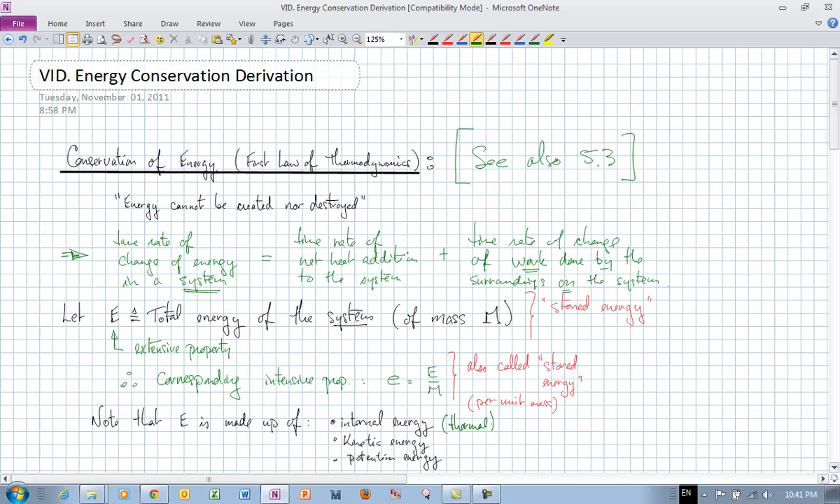Okay, so what makes up this stored energy? What are all the components of it? Well, we've all seen this before. The main components of stored energy are the internal energy, also called the thermal energy of the system. This is why a cup of water at room temperature has less stored energy than a cup of water that you put in the microwave for a minute. That's because the component of stored energy made up of internal energy is higher in the hot water than the cold one.

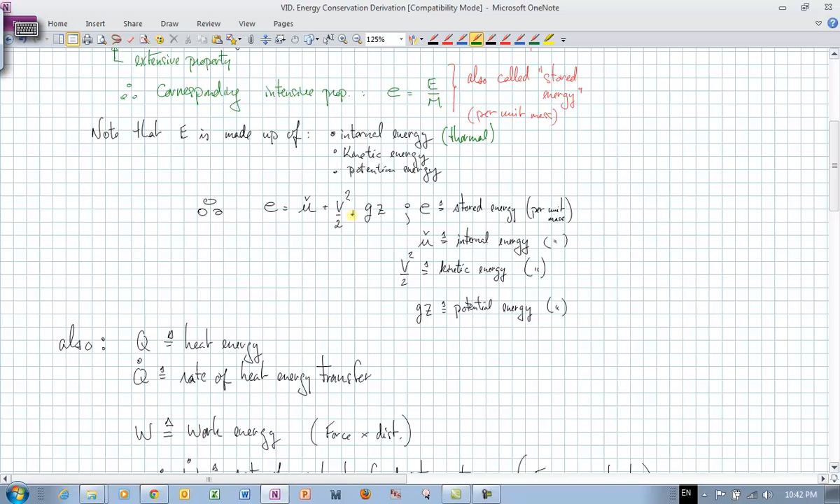Kinetic energy, that's the energy due to the movement of the particles. Half mv squared is what we're used to thinking, so therefore the kinetic energy per unit mass is simply v squared over 2. And the potential energy, the energy due to the position of the particles above a datum, mgh is what we're used to seeing. So per unit mass is going to be mgh divided by m, or gh, or according to a datum that goes with z, g times z. So therefore the total stored energy is going to be the sum of these three different forms of energy: internal energy per unit mass, kinetic energy per unit mass, and potential energy per unit mass. So that's it for the stored energy of the system.

Now we talked about heat, so let's go over that a little bit more. That's one of the things that can change the total stored energy of the system. So we're going to use the letter Q to denote the heat energy added to the system, or the rate at which that heat energy is added. We're going to call it Q dot.

Similarly, the total work energy that is being added to the system, we're going to denote that with the letter W, or the rate at which work is being transferred into the system is W dot, and of course the time rate of change of work is power. Remember from basic physics, work is defined as force times distance.

So the rate at which we're going to do work on a system is going to be force times distance over time, or velocity. Force times velocity. We're going to use that in a few minutes to illustrate an important point. But for the time being, let's just worry about Q dot for heat in and W dot for work.

Alright, so how do we go from this system representation to a control volume representation? Well, we're getting pretty good at that. We're using Reynolds transport theorem.

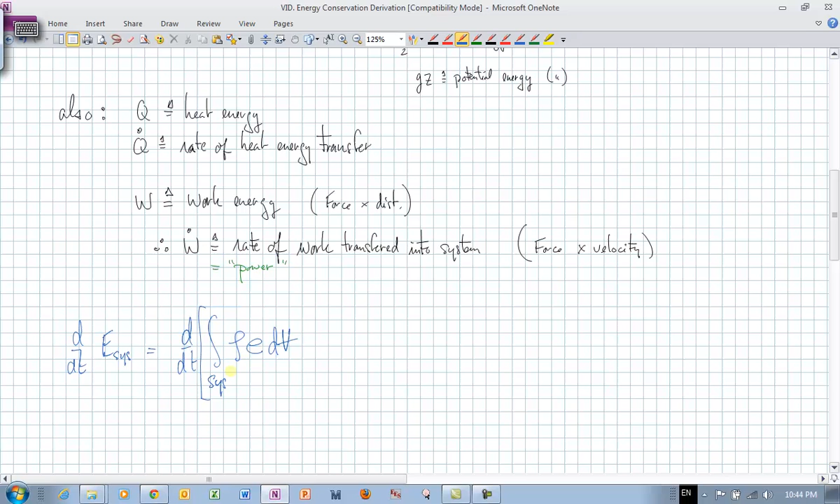So let's look at how we would use Reynolds transport theorem to do that. I've got a system with total energy big E sub sys, which I can get by integrating over the volume of the entire system, multiplying the density at any point within the system times the stored energy per unit mass times dV of that system. By this time it should be pretty clear to you why those two are the same.

So we've got that now in a nice form that we're used to using Reynolds transport theorem with, but we're not going to use it just yet. We're going to express the statement of conservation of energy on that quantity on the left here. So we're saying that's equal to the total energy being added to the system. The rate of change of the stored energy is equal to the total energy added to the system, which is made up of two parts, heat and work.

So we've got Q dot net in for the rate of heat addition, plus W dot net in for the rate of work addition onto the system. All this is system based. So that's our general statement of conservation of energy.

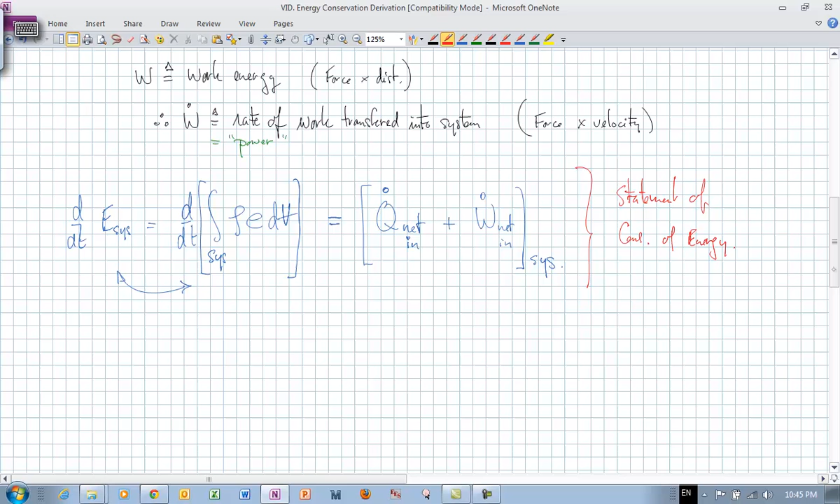Now we're in good shape to start applying Reynolds transport theorem. I'm going to use a representative control volume on which I'm going to apply Reynolds transport theorem. I'll use the RTT number 1 form, the restricted form, and simply generalize it afterwards to RTT number 2 and the general RTT form without proof. So we'll prove it for RTT number 1.

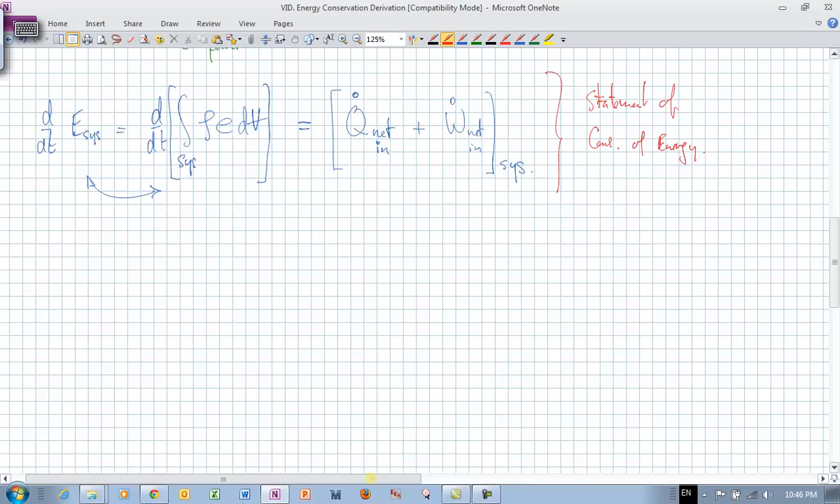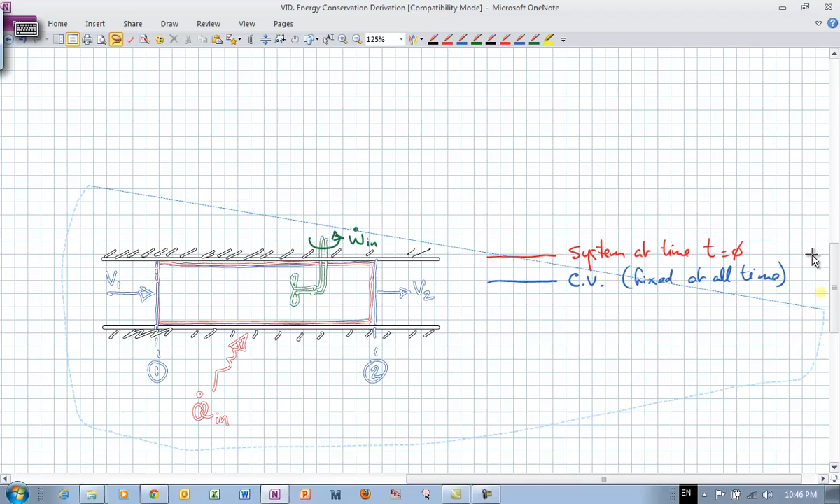Okay, so let's look at an appropriate control volume, and I'm going to use some of my witchcraft here to speed things up. So that's the system and control volume that I want to use for Reynolds transport theorem.

So we've got flow in a pipe, for example. We've got a fluid of fixed mass quantity illustrated in red, which represents our system at time t equals 0. At that time, this system matches exactly an outline in blue corresponding to our fixed control volume in the pipe setup. At face number 1 of the pipe, we have velocity coming in at speed v1. At face number 2, velocity going out at speed v2. We're adding heat to the system in this part of the pipe at a rate q dot in, and we've got a propeller shown in green that's adding work to the fluid, shaft work, at a rate w dot in shaft. I'm putting 'shaft' here to differentiate it from something else we're going to do in a few minutes.

So what do we have here? We have one inlet and one outlet, denoted by 1 and 2. We have uniform flow properties at plane 1 and plane 2, at inlet and outlet. Remember, I'm not saying the properties are uniform throughout the entire control volume, just that they're uniform along the plane through which there's mass transfer in the control volume. That's all we're saying. And third, the flow is perpendicular to the inlets and outlets. I use the plural here, but of course we only have one in and one out.

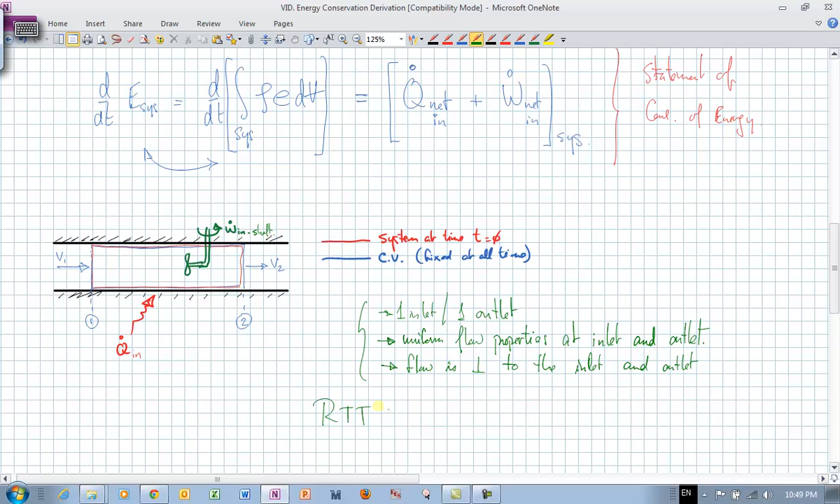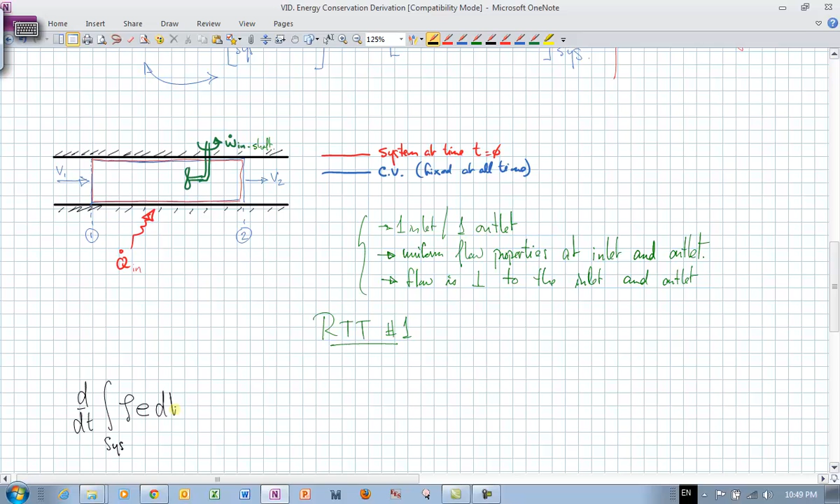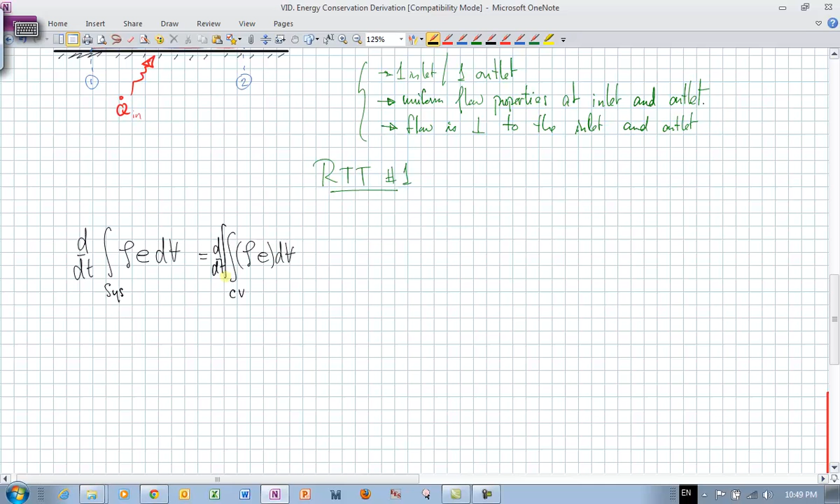So with these 3 conditions, what's the form of Reynolds transport theorem I can use? That's right, RTT number 1, the restricted form. We know how that works. Let's go with it. It's telling us that the derivative of the integral over the system of rho e dV must be equal to the derivative of the integral over the control volume of rho e dV, plus our unsteady term.

Minus rho v a times little e at the inlet, plus rho v a times little e at the outlet. That's our Reynolds transport theorem.

And of course, because of conservation of energy, as we stated before, this guy right here on the left is equal to Q dot in net plus work dot in net. I say net because there could be some work being extracted from the system and some work being added to the system. Really what I care about is the balance of those two things, the net addition of work to the system.

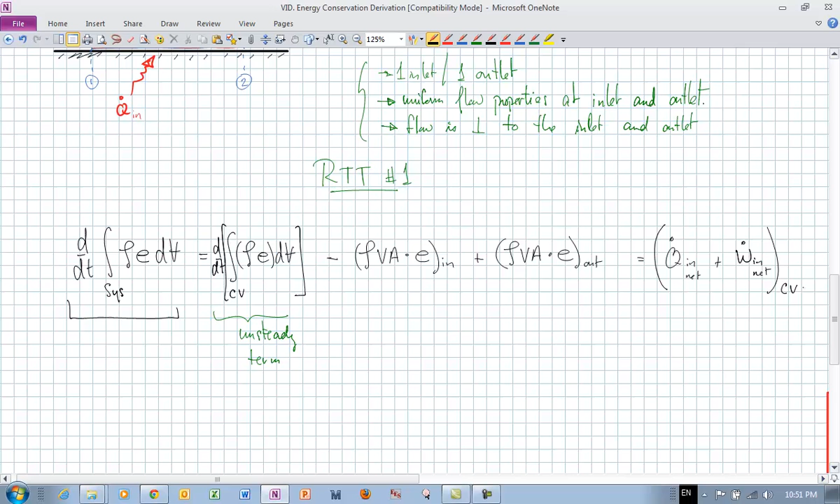At a time t equals 0, the system coincides with the control volume. So while strictly speaking, this energy addition was for the system at t equals 0, which is where I'm applying Reynolds transport theorem, this is the heat and the work done on the control volume. So our statement of conservation of energy was this, but Reynolds transport theorem allowed us to say that.

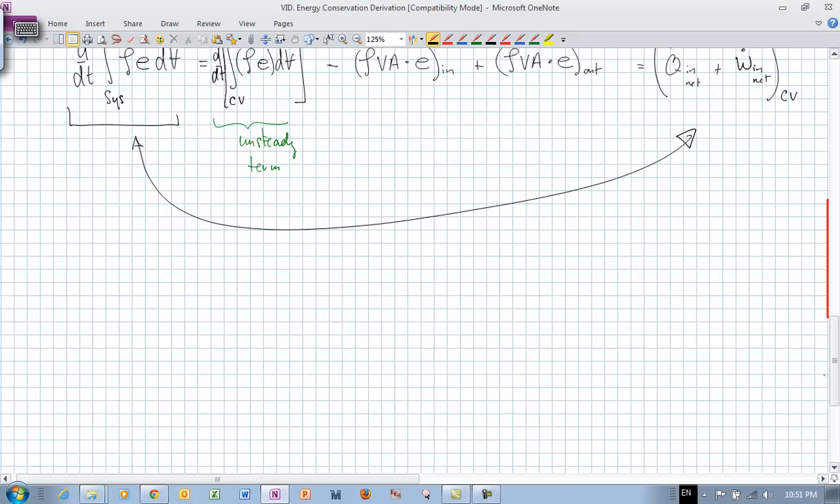So therefore, the net result for the energy equation is this guy right here, first form of the energy equation. Energy equation, first form. Et voila.

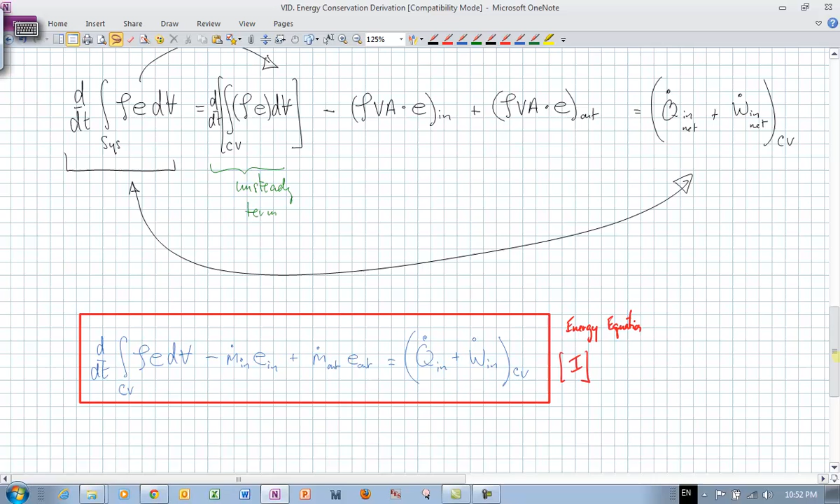Okay, but we're not quite done yet. We've got a little bit more to do. You should recognize here, there's one more thing that I skipped. This guy right there is, of course, equal to m dot in. This guy right there is m dot out. Hence, how we ended up with this form right there.

Moving on, I want to highlight a special feature of the work input to the system. The work input to the system can really be broken down into two parts. The first part is the shaft work that would correspond to the propeller in the little control volume I showed you before, plus another type of work that I'm going to call flow work. Okay, flow work. What is this flow work?

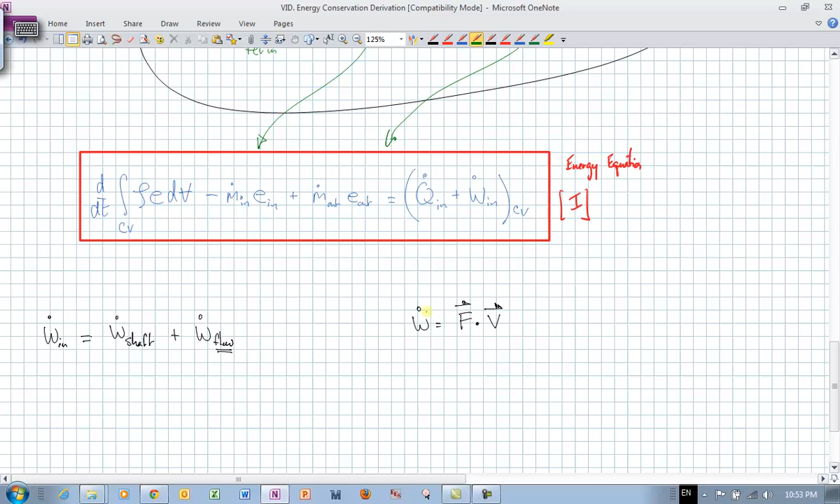Well, it comes from the fact that the rate at which we do work is equal to the force vector dotted with the velocity vector on a fluid. You notice here that the rate of doing work to the control volume is a scalar, but each of those guys on the right hand side is a vector, right? Of course, the fact that we've got a dot product in between turns this into a scalar. So what this tells us is what we're really interested in is the orientation of the force acting on the control volume and the velocity at which the fluid flows into the control volume. So that would represent a form of work, the flow work.

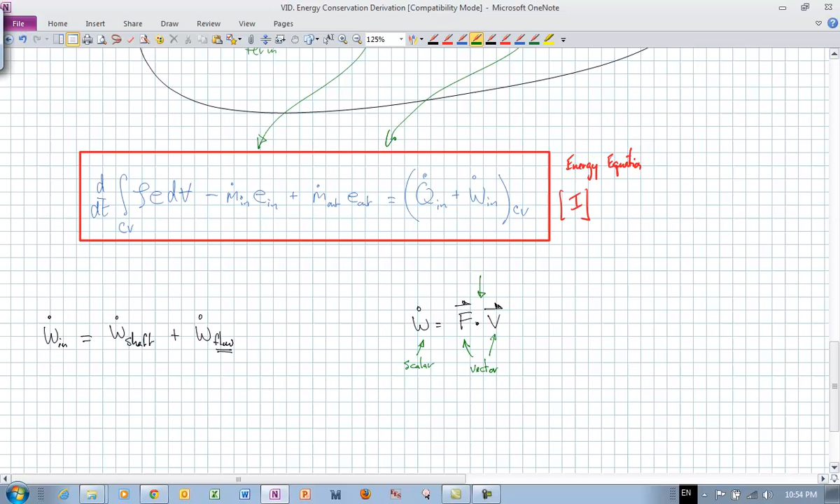Okay, so what are the forces that create this kind of flow work on our control volume? It would be the normal stress that's acting on each of the surfaces of our control volume. So let's look at what they look like. Normal stress corresponds to forces acting on the control volume surfaces.

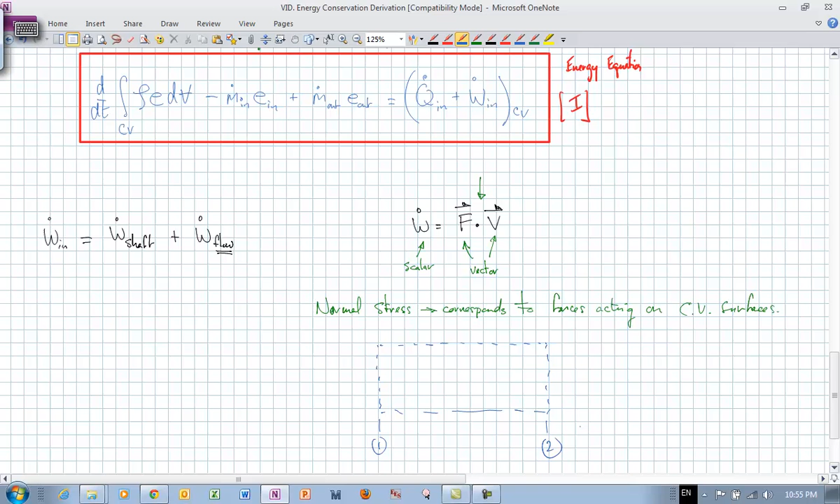So in our case, what we're looking at is our control volume. I'm not showing the wall of the pipe, I'm just showing the control volume, which has these two sections, 1 and 2, and the velocity that comes in on that side and the velocity that goes out on that side.

We still have a normal, okay, these are vectors, so we put those down. We have normal vectors at each of the surfaces, and these normal stresses acting on the surfaces are due to the pressure of the fluid. So we've got a pressure force. Remember, pressure is a scalar, but the pressure is acting inwards on all of the surfaces. So I'm going to have a pressure force on each one of these surfaces. And since it's a scalar, I have to multiply it by the normal to get the vector force that acts in that direction.

So in this case, I'm going to have the pressure times the area, a scalar, times minus the normal vector in order to get the vector pointing in the right direction over here. Similarly, on that side, I'm going to have the pressure times the area times minus the normal vector to that area to get the proper direction. At the top and bottom, what we've got is the same thing. I've got PA times minus N, PA times minus N.

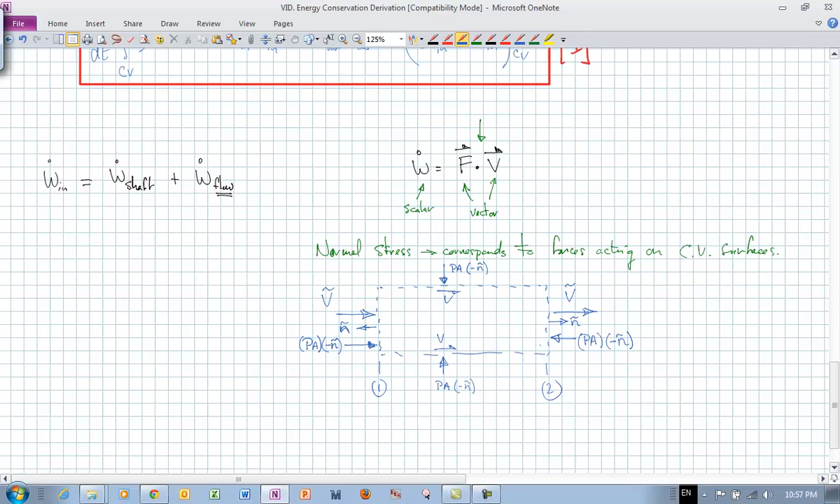Okay, so let's break this down into the two surfaces, the inlet surface at 1 and the outlet surface at 2. I'm going to use a subscript 1 for in and 2 for out. So at 1...

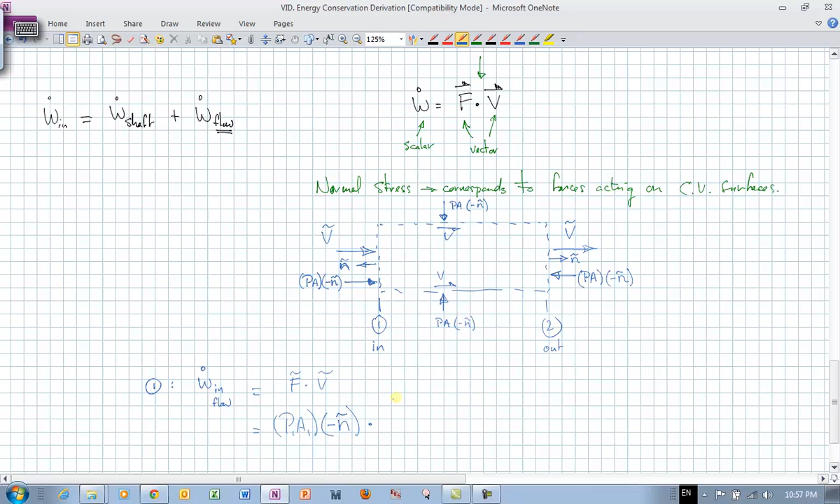My work in due to flow work is going to be equal to the force times the velocity at 1, which is equal to P1 times A1 times N, times minus N, dotted with V at 1. So this is equal to minus P1A1, just a scalar, times N dotted with V at 1.

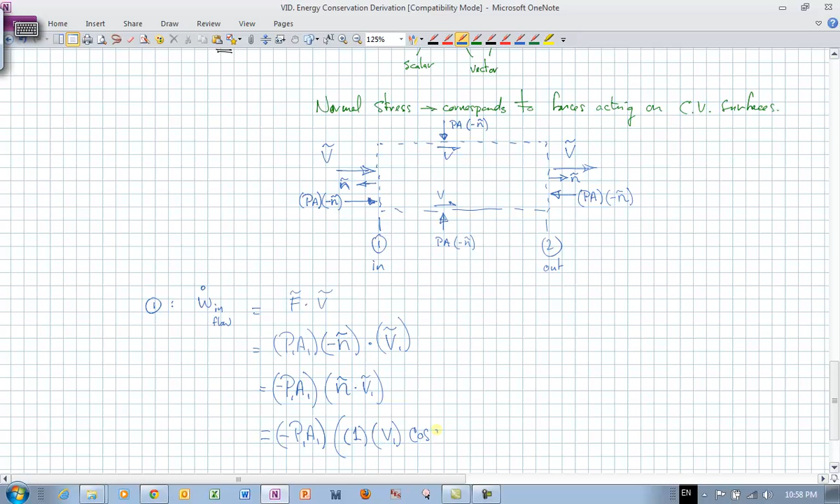Well, N dotted with V at 1 is equal to the magnitude of V, the speed, times the magnitude of N, 1, and the cosine of the angle between them, which is 180. So I'm going to go through this in every detail here so there is no confusion. So I've got P1A1 times the magnitude of N, which is 1, the magnitude of V1, which is V1, not a vector anymore, just a scalar, times cosine of the angle between them, which is 180. And of course the cosine of 180 is minus 1, so you see where this is going. So I've got minus P1A1 times V1 times minus 1, which is equal to plus P1A1 V1.

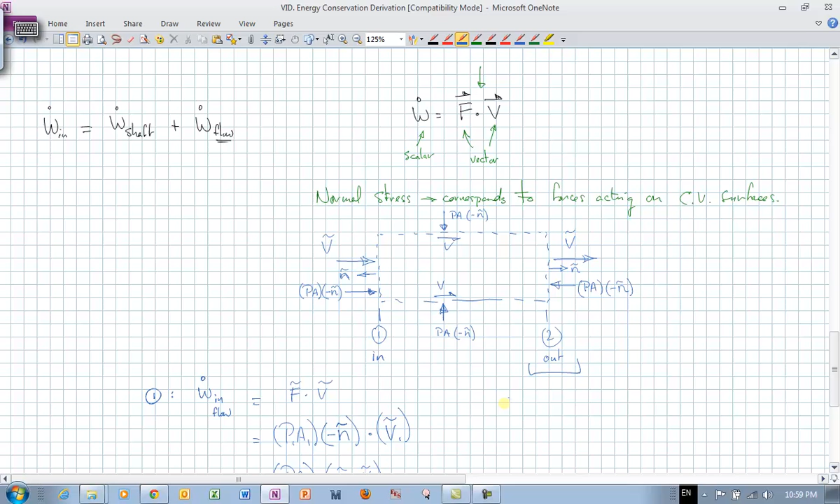Okay, so this is the flow work going in to the control volume at surface 1. Okay, at surface 2 now, so 2 is my outlet. Okay, I'm going to do this over here, maybe at 2.

What do I have? I've got the work that is now out due to flow, right? Because flow is coming out of my control volume. It's pushing on the fluid that's outside the control volume. So I'm extracting work energy out of the control volume. It requires energy from the control volume to perform this work.

So it's flow work out. That flow work out is equal to the force exerted by the control volume on its surrounding times the velocity at which it's going, which itself is equal to P2A2 times minus the normal vector at 2. That's the force exerted by the control volume on the surrounding fluid, dotted with the velocity at 2.

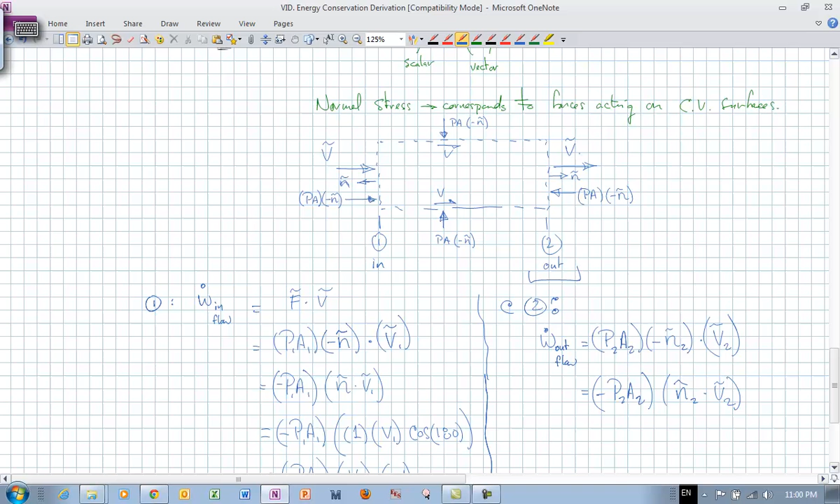Okay. Well, in a similar manner to what we did before, that's equal to minus P2A2 times N2 dot V2. Well, in this case, though, V and N are oriented together because they're both pointing outside, so the cosine of the angle between them is going to be plus 1. So this whole thing here is going to be equal to minus P2A2V2. V2 is the speed at 2.

Alright, so I've got an expression now for the flow work out, at surface 2, and the flow work in, which is at surface 1. So therefore, the flow net in is going to be equal to work in flow minus work out flow, which is going to be equal to P1A1V1 minus...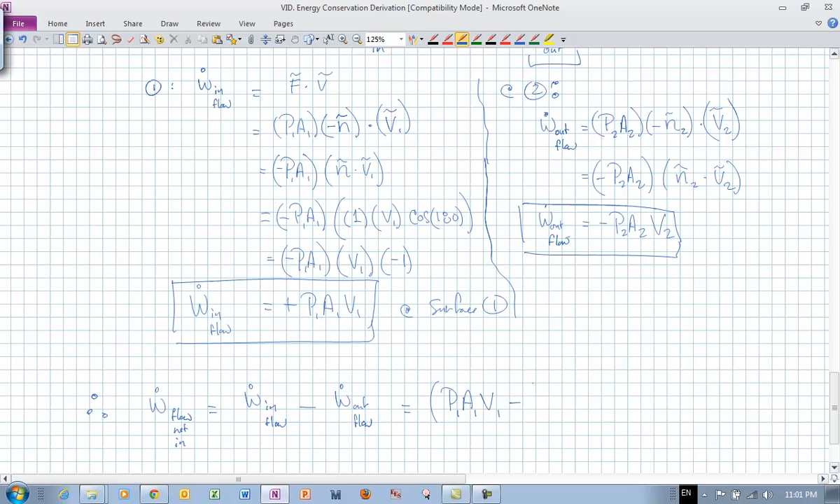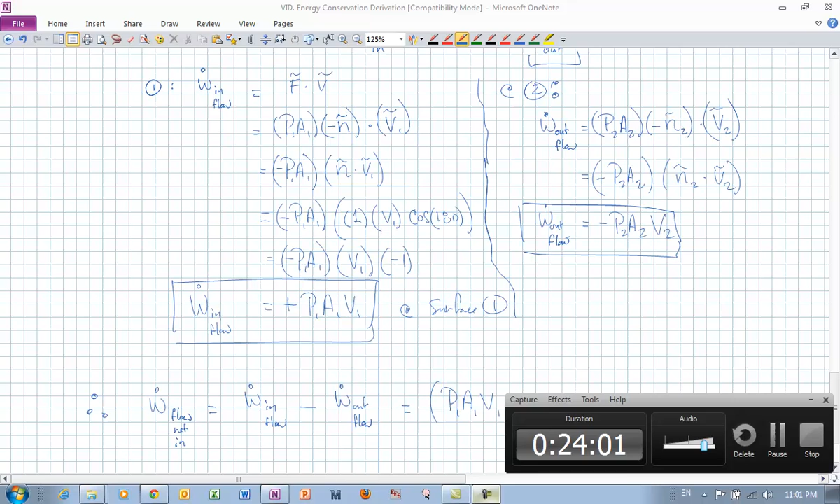Okay, little error here. I'm going to have to correct that. Sorry about that. So the force, the work is the force times the velocity, but they both have to be aligned. It's the force times the velocity in the same direction. So my vector right here is not pointing in the correct direction. That's the force exerted by the surrounding onto the control volume. But what I'm interested in here is the force exerted by the control volume on the surrounding, because that's the work that I'm extracting from the control volume.

So really what I've got is a vector pointing in this direction that represents the force at 2, the force that the control volume is exerting on its surrounding. The magnitude of that force is PA, a scalar, times N, a vector that points in the other direction. So let's correct what we've got over here.

So that means I've got F2 dot V2, so F2 is P2A2 times N2 dotted with V2, which is equal to P2A2 N2 dot V2. N2 and V2 are aligned together, so that gives me the net flow work out of the control volume, or the flow work due to the control volume exerting a force on the surrounding, equal to P2A2V2. Okay, alright.

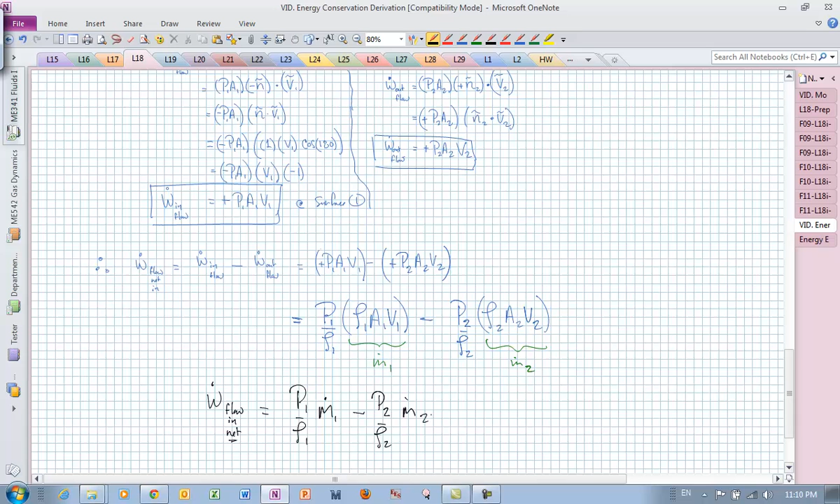Okay, and that gives me my final result, what I was really after, which is the net flow work in, which is equal to P1 over rho1 times m dot 1 minus P2 over rho2 times m dot 2. And what I'm going to do with that is I'm going to

substitute that back in that equation that I had for one before. So substitute in energy equation 1. And get... one moment.

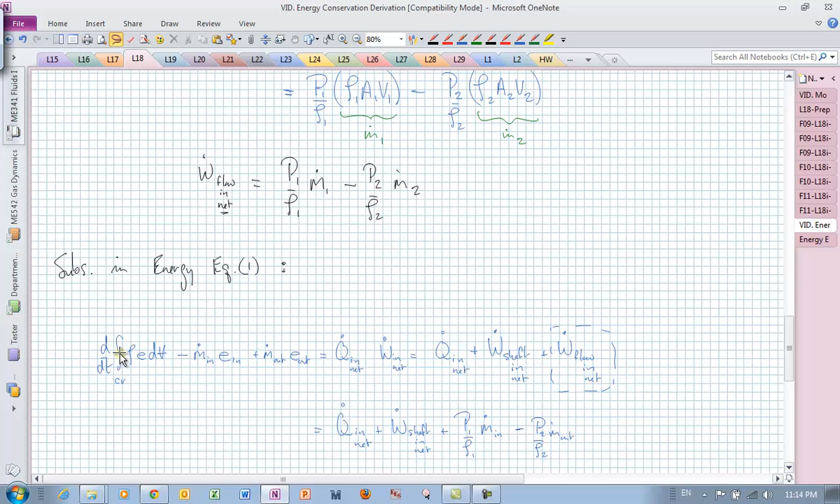So what we're getting is the expression that we had for equation 1, which is everything that you get over here ending at the net work in to the system. What I've done over here, oops, there's a little plus missing right there, is I've split the work in into two parts: the shaft work in and the flow work in. And we've got this result that we've just derived for the net flow work in.

And when we substitute that in there, this is what we get. So we get the net heat in, plus the net shaft work in, plus P1 over rho1 m dot in minus P2 over rho2 m dot out. And then what we do next is we grab these two guys and move them to the other side.

To give us our next energy equation 2, because P1 over rho1 go in with the stored energy at 1 at the inlet, and P2 over rho2 go in with the stored energy at the outlet. And all that we're left with on the right hand side is the shaft work in and the net heat in. Okay, that's another form of the energy equation that is also very useful, very practical.

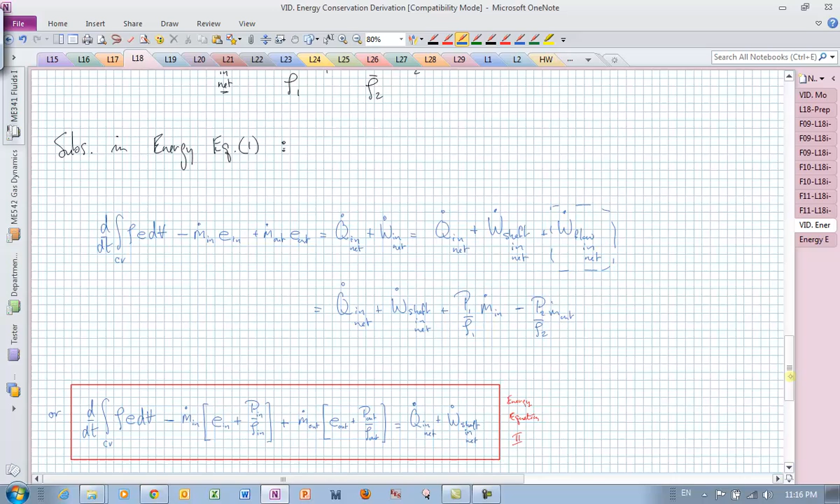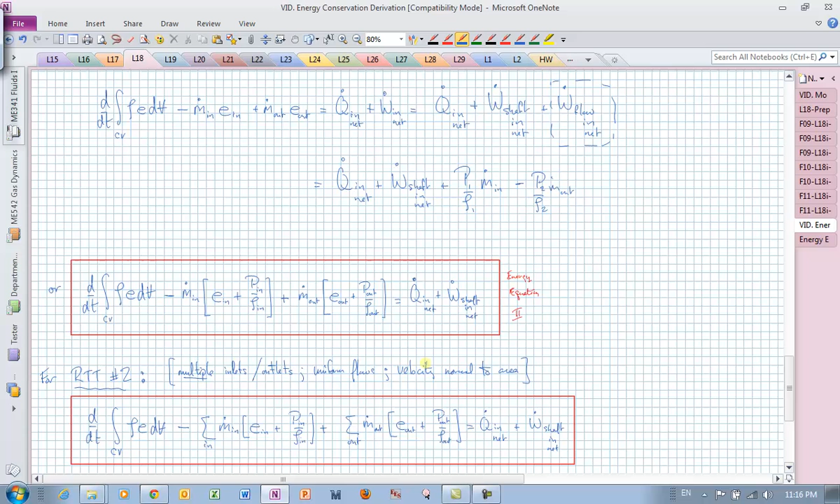And that's it for Reynolds Transport Theorem number 1 for the energy equation. As promised, I've got the forms for multiple inlets, multiple outlets. That's our RTT number 2, given that the flow is still uniform and that the velocities are normal to the area. As usual, dead easy.

Just slap a summation term in front of the two flux term. Flux of energy in is negative, the flux of energy out is positive. That's equal to the net heat in plus the net work in, net shaft work in.